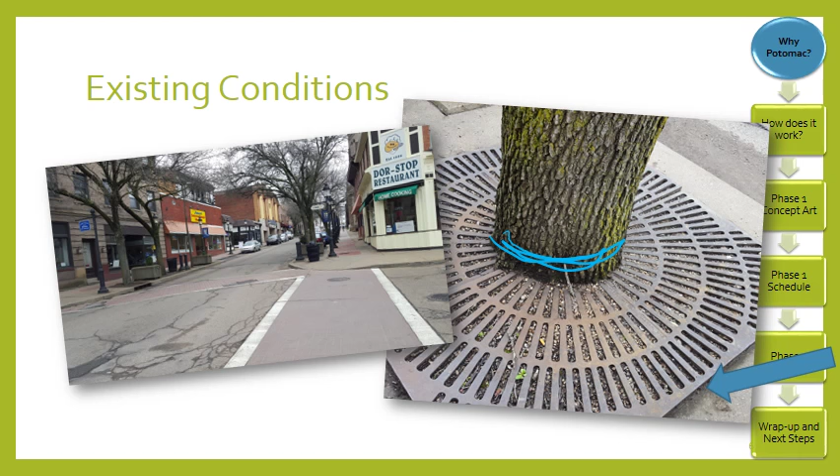Here we see the existing conditions along Potomac Avenue. We know that there's cracking throughout the roadway itself. The trees are outgrowing the tree rings. This tree, in fact, has already captured the inner ring of this metal grate. And the trees are also pushing up these tree grates, creating tripping hazards throughout the district.

As a comparison for the current proposed project, we provided estimates for other options available to us, including a mill and overlay of 4.5 inches of asphalt with no sidewalk repairs that would cost just under $105,000. Total reconstruction with a new stone base and geofiber mat with an asphalt top, and again no sidewalk repairs, for a total of $203,000, or our current project proposal, which is total reconstruction with a paver surface, including the sidewalks.

This would have a base built to exceed the H20 standards, complete sidewalk replacement, and also includes about a 15% contingency fund. Total construction costs are estimated at $471,000.

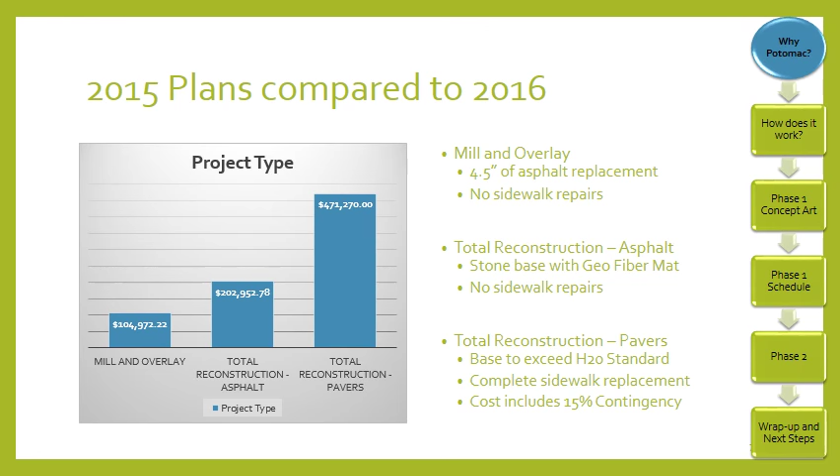Over the last several years, the Borough of Dormont has been working in the Allegheny Together program with Town Center Associates. We're in the final months of the program but have applied for an additional year and expect that to be granted. This group provides research and assistance to the borough for business development and overall aesthetics for our business district. They are currently recommending a business mix with at least 80% retail, food, and entertainment. Unfortunately, we currently sit at only 60%.

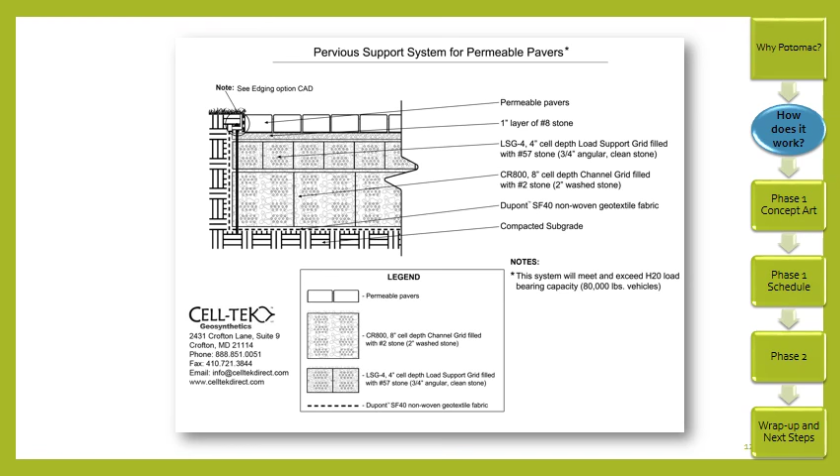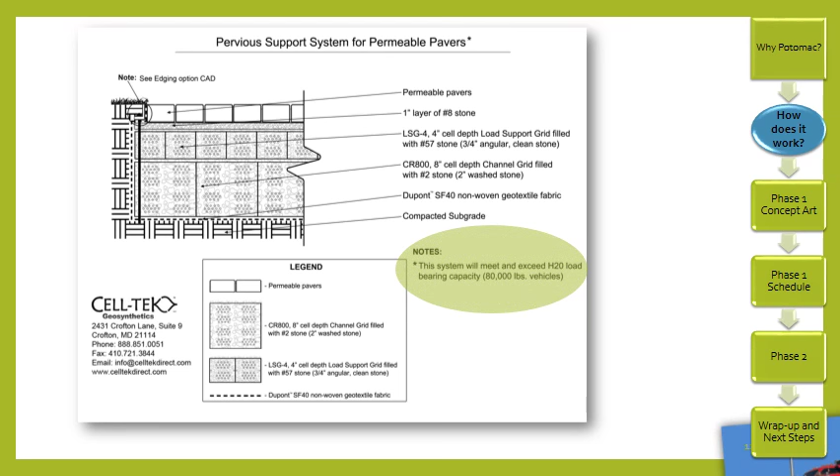Here you can see an engineering cutout of the system I just described, with the compacted subgrade, non-woven geotextile fabric, the channel grid, load support grid, number 8 stone, and the pavers. One of the key features of building a road in this fashion is that it will then provide us with the H20 load-bearing capacity, meaning that this roadway will now be able to accept vehicles up to 80,000 pounds, as well as the heavy traffic that it currently experiences.

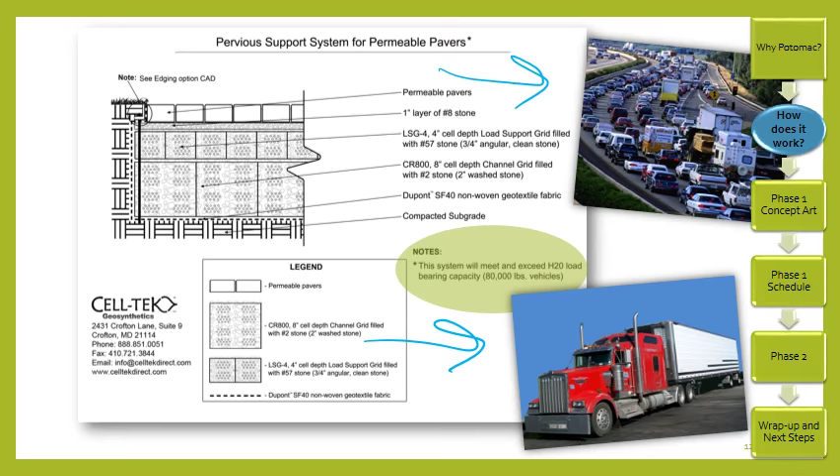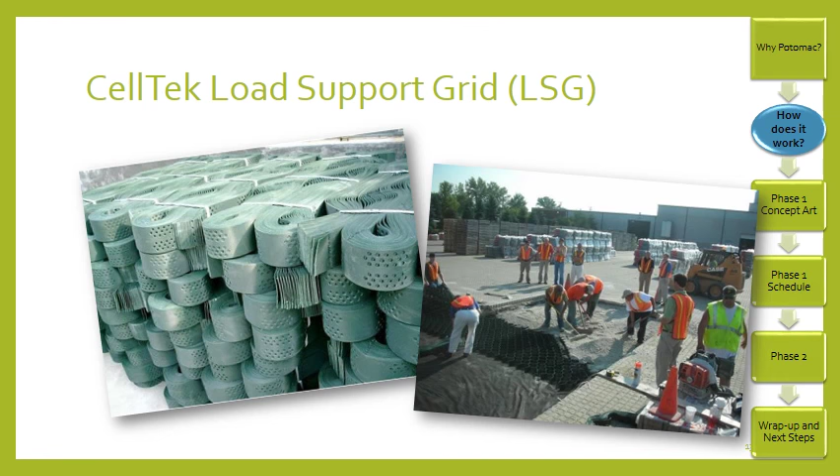This slide will give you a look at CellTek's load support grid that we are proposing to use. On the left is a picture of the material as it comes off the truck, and on the right you can see as it's spread out like an accordion to provide a stable base for our future roadway.

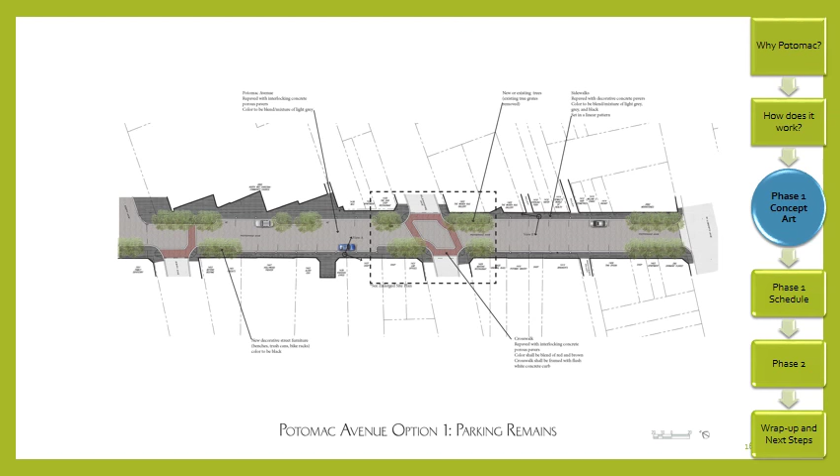At this point, we'll take a look at some of the concept art prepared for us by LaQuatra Bonci Associates, including Principal Joe Hackett. The first option for Potomac Avenue would keep the parking as it exists currently. You can see our preferred style with a change in color for the crosswalks, which should help to draw the attention of drivers to any pedestrians.

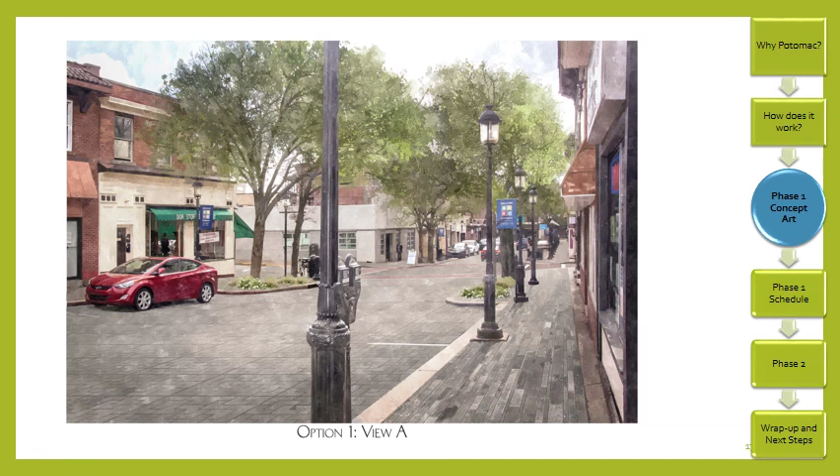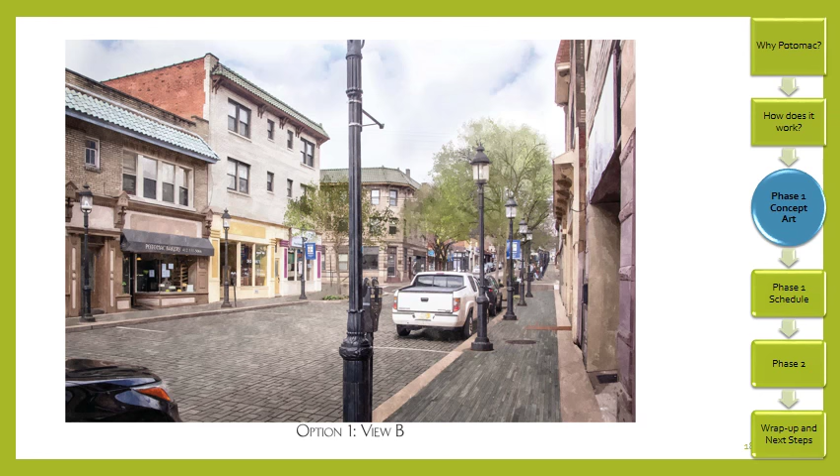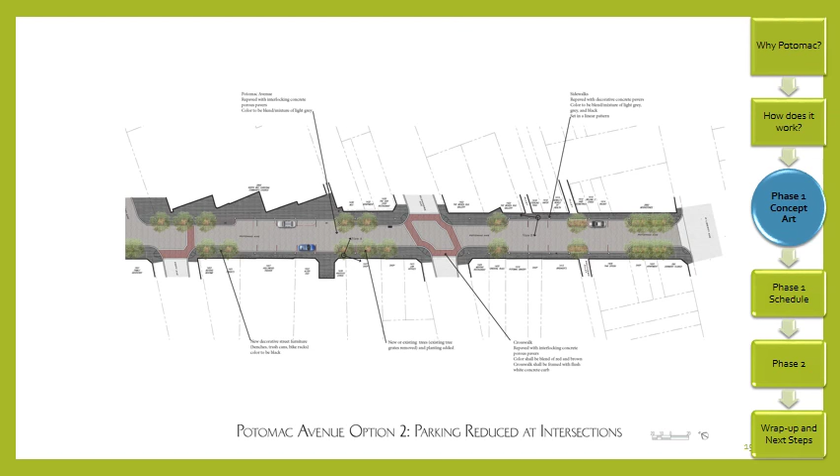Here is a second view of Potomac as it sits today, and now we will see the change from option 1. Again, the linear pattern in the sidewalk against the interlocking pattern in the roadway itself. The second option for Potomac Avenue reduces parking at the intersections. This would be done to increase community space used by pedestrians.

As we look again at view A, with the changes in option 2, you'll see that there's space for new benches as well as dining areas outside of restaurants like the Door Stop. And here again is view B with the changes done by option 2. And finally, the third option would remove all parking in this area of Potomac altogether. This would allow us to spread the trees out a little more and increase the community space in what is currently the parking area.

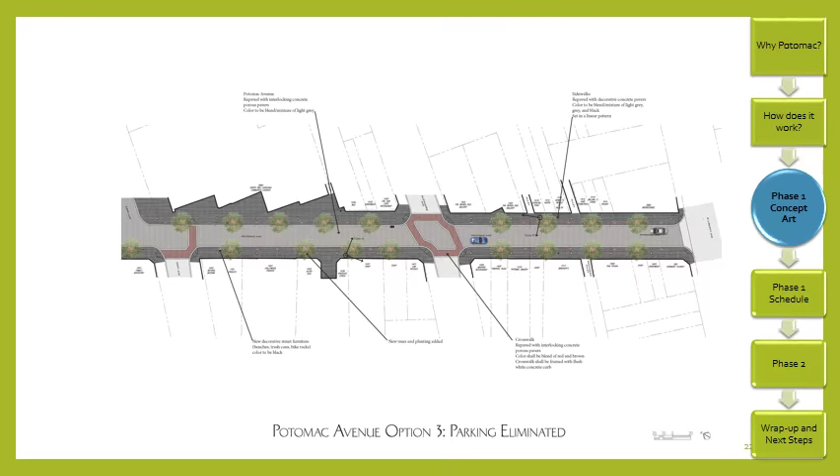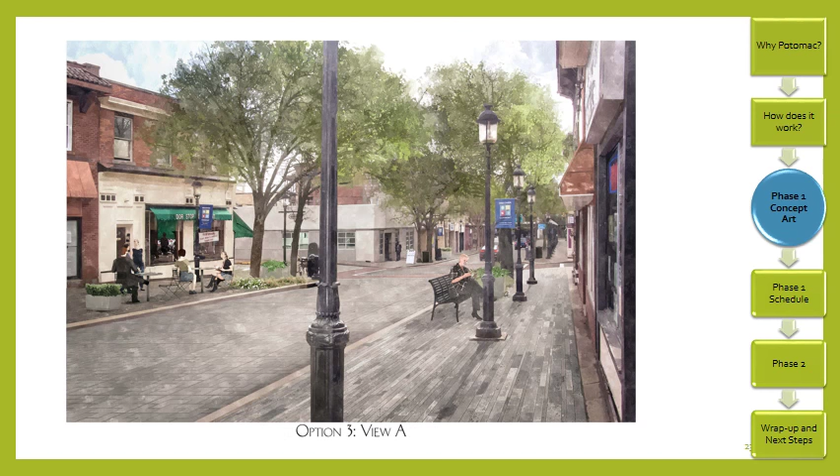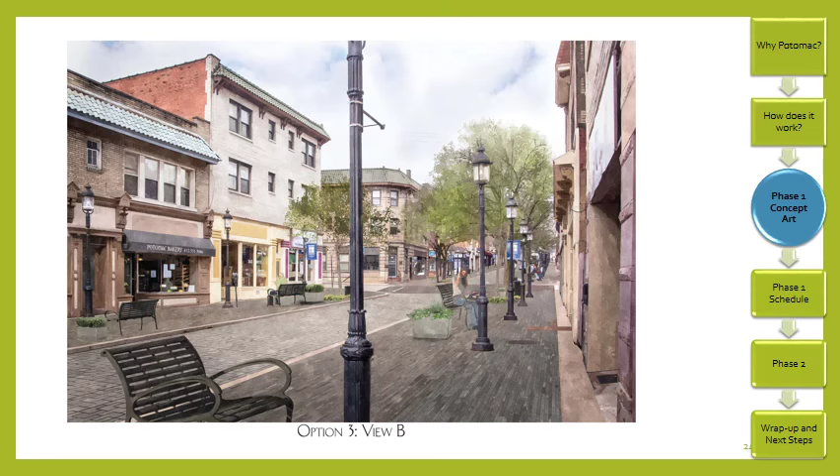And again, we take a look at view A with the changes being proposed by option 3. This gives a wider promenade style walking area and minimizes the amount of road space. And finally, view B with the changes from option 3. The picture in the upper left here shows you the kind of look that we are going for, with contrasting patterns of a flat color in the roadway and heavier contrasts in the walkway itself.

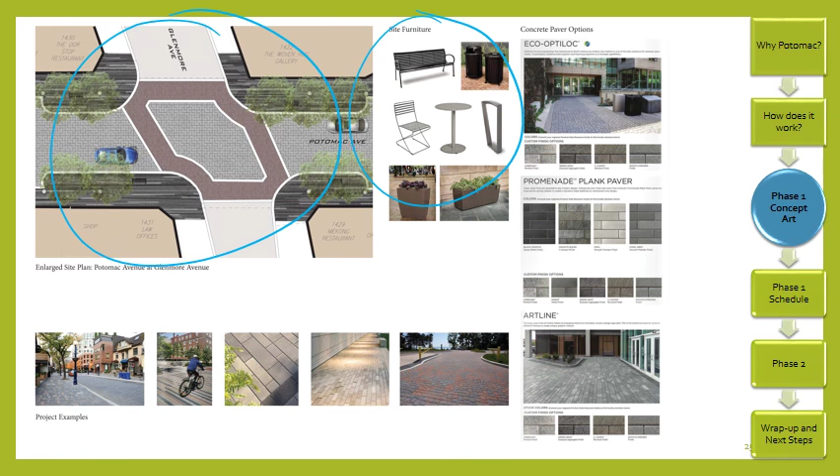In the next section, you'll see just some examples of proposed site furniture, which would match up with the classical look of the area, but add a bit of a contemporary style. And now we will take a look at the proposed schedule for Phase 1 of the Potomac project. Pennsylvania American Water expects to begin waterline replacement on May 1st. On May 2nd, we would seek Council's bid authorization, followed up by a public comment period.

In June, we would advertise for bids, have our pre-bid meeting, and hopefully see Pennsylvania American Water finish in the middle of the month, in the best case, and at the end of the month, in the worst case scenario. Columbia Gas will begin their work as soon as Pennsylvania American Water completes theirs, so either mid-June or at the very beginning of July. At that point, our bid review should be completed, when we can then award the contract and issue a notice to proceed and hold our pre-construction meeting.

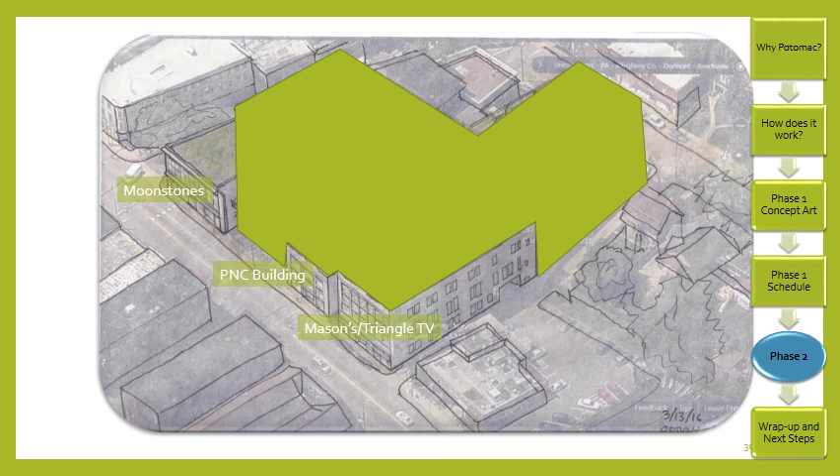In August, we expect to see Columbia Gas finish their installation between the 15th and the 30th. Borough's work on the roadway and the sidewalks would begin on August 16th and continue through September and be finished by mid-October, hopefully in time for our street fair on October 8th. Here we will look at Phase 2, which involves business development and potential public-private partnerships. Dr. John Snyder has currently purchased the Moonstones building, as well as the PNC building and the former Mason's building and current Triangle TV.

What is being talked about is new construction on that site, as well as maintaining the older structures. This adds in a completely new large-scale building with a parking garage in the rear facing Glenmore and a rooftop park. The current proposal would include the borough managing the parking garage and the rooftop park on Dr. Snyder's property. He has already secured multiple companies who have interest in moving into his new facility.

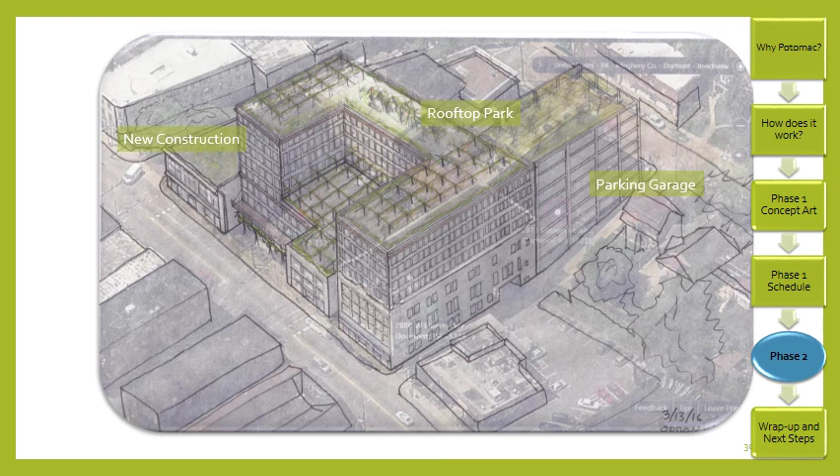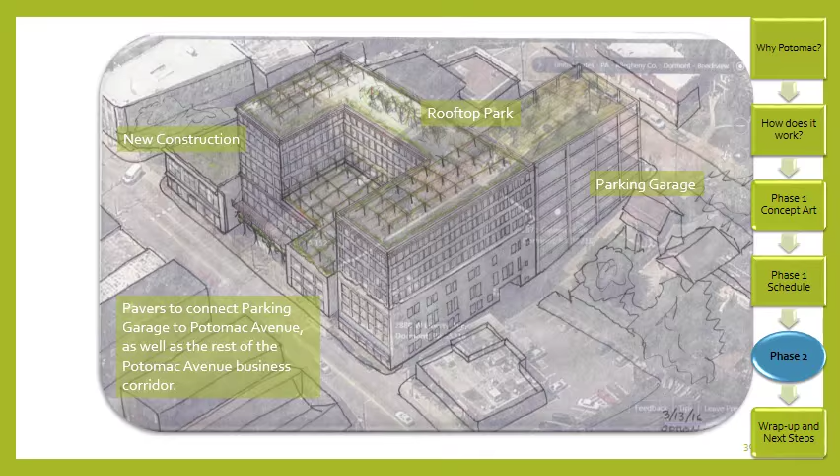In addition to the building construction, the borough would look to connect the paver project along Glenmore Avenue to draw people over to the new parking garage. We would then look to extend the paver project through the entire business district on Potomac Avenue, crossing over the T-tracks. And finally, we'll just take a quick look at the items that we've covered and what the next steps are to move forward. To review, we took a look at the current design, which was built in 1980, and found that the borough recognized the need for repairs and planned to resurface Potomac Avenue in 2015.

We know that the sidewalks and streetscaping are experiencing multiple problems. Town Center Associates has identified the Potomac corridor as Dormont's primary business center. The Unilock pavers create a functional and attractive environment. And the road design stabilizes the foundation while slowing down and filtering stormwater. This basic concept is already drawing serious investor interest.

So next, we'll look at Phase 1, where we will need to conduct business district meetings, meet with our Planning Commission, the Property Supplies and Planning Committee for Council, receive Council authorization, apply for a Pennsylvania Infrastructure Bank loan, select a final design, and then finalize our construction mitigation plan, which could include free parking for people visiting our business district throughout the construction period.